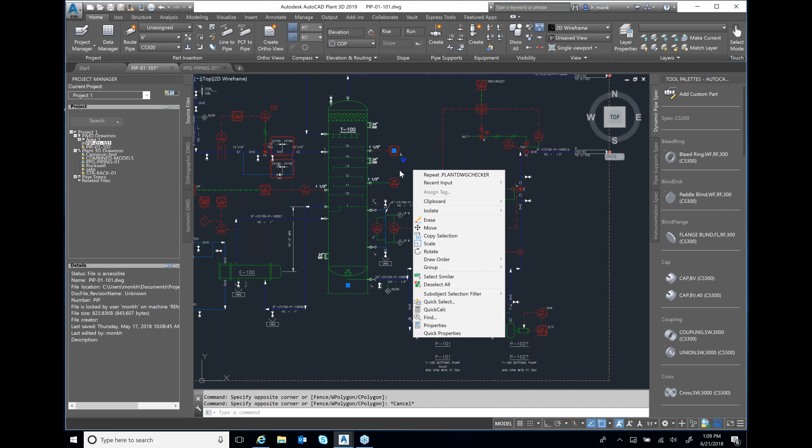So when you see this box pop up, I'm just hitting the right mouse button. If you get lost, I'll point that out a couple of times of how I want to use some information. For instance, let's go create a drawing.

So I'm just going to come over here to the project. I'm running just a simple project - it's got a couple P&IDs and some piping drawings in here. And I just right clicked and let's just create a new drawing. We'll just call this one... we'll call it cansel. So what will happen is I'm going to add a new P&ID to the project.

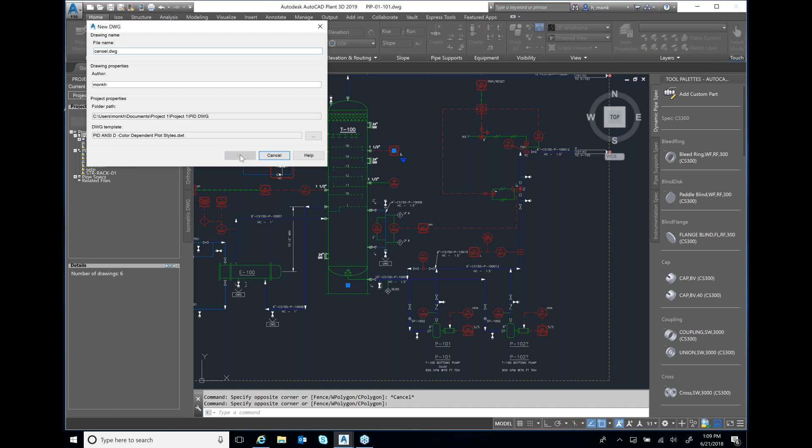And you'll see it pop up on the screen here. There we go. And we'll hit F7 to get - let's get the grid off the screen. Come on. Oh, I got to hit the function key. This is the new keyboards - not a fan of the new keyboards.

So anyway, let's go draw some equipment. You notice across the top that our tool palette is all set to three-dimensional pieces. Now, AutoCAD runs what we call workspaces. So I can come down here on workspace and you'll have all these options. Of course, you can adopt and create your own workspace, but I want to draw P&IDs. What will happen is it will automatically turn itself into a P&ID template system, to where now the equipment, here's the valves and stuff for the P&ID. So all this stuff changes based on what you select.

So let's go quickly, we'll throw some pieces on here. So we'll throw a pump on the drawing here. You'll notice when I place the pump in the drawing, it automatically asks me for a number. The project says that every piece of equipment has to have some type of identifier, P-dash something. So we'll call this P-400.

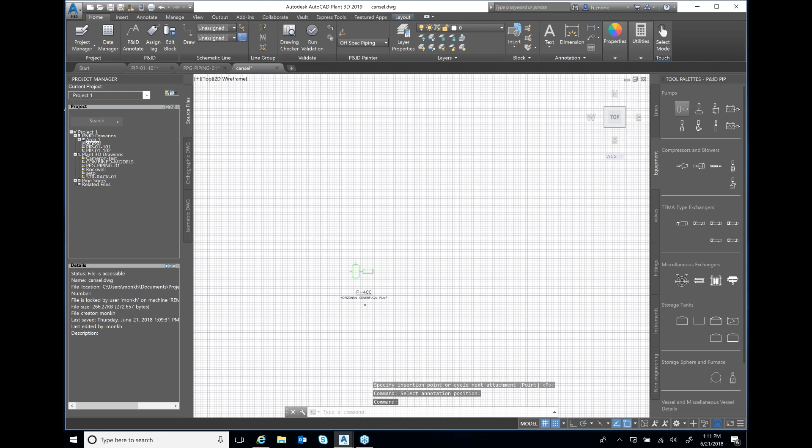We can assign a tag. What I mean by assign a tag is what type of information would you put. We'll throw an information tag on the bottom. And you can see - oh goodness - that's there. You can see that the pump and now the equipment has a unique number to it.

One thing I want you to really understand about this package, and I'm going to say this several times, this is not a third-party package. This is AutoCAD. Anything that you do in AutoCAD, you can do here. And to show that, I'm just going to type in the word copy. As you saw me type on the screen, I'm just going to say copy - I'm going to copy this pump.

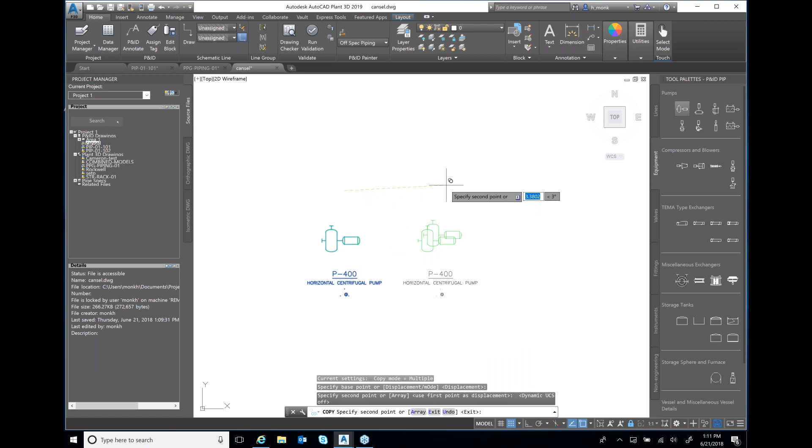We'll drop it right here. You'll notice when I tell it where I want to copy the piece to, inside the data itself, inside project number 1, it says you already have a 400. It will put a question mark there showing that you cannot have duplicate numbers inside a project for P&IDs. So what we'll do is come here - everybody know what the properties box is?

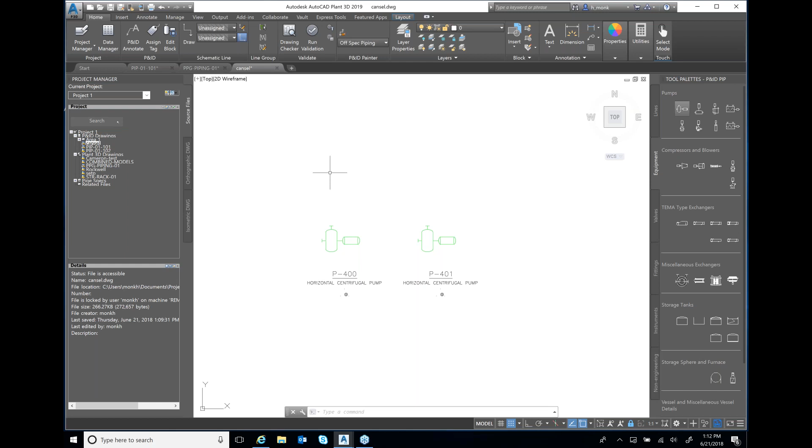I just have to come here and tell it to change that. What it has done, guys, is when I changed that number just by the edit command, it actually changed all the line list, the equipment list, and everything, even though I used free text. This is quite unique to AutoCAD, because remember, this is AutoCAD, not a third-party package, so this data remains intact even when I use free text.

Let's back up a little bit and put a piece of equipment out here, like a tower. Once again it asks me, so we'll throw a number out here, say 505, and we'll drop the tag in. So that's how equipment gets placed in.

The question always comes up: what about equipment that is not in our tool palette? So what's not in our tool palette - if I could do an insert of a block, let's say that's something you have. So we can go out to...

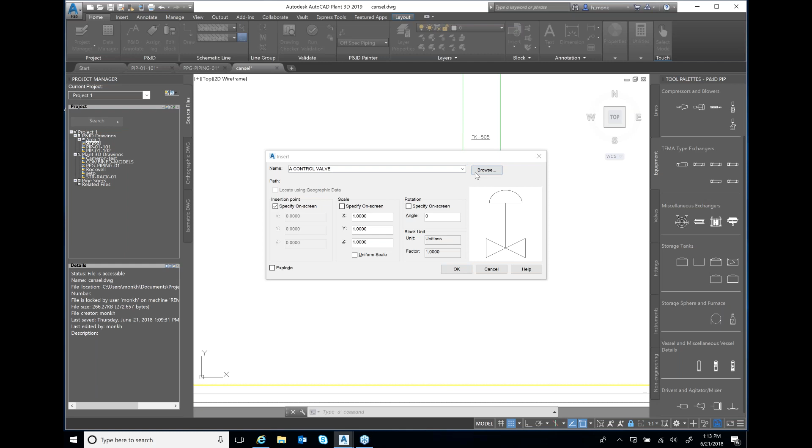Let's see - I had a person send me an exchanger the other day, so I'm going to show you what he sent me and wanted to know about. So there's an exchanger. If I do a list, you'll notice this is strictly a straight block - nothing special about it. It's just an AutoCAD block he brought over from 2015, if I'm not mistaken.

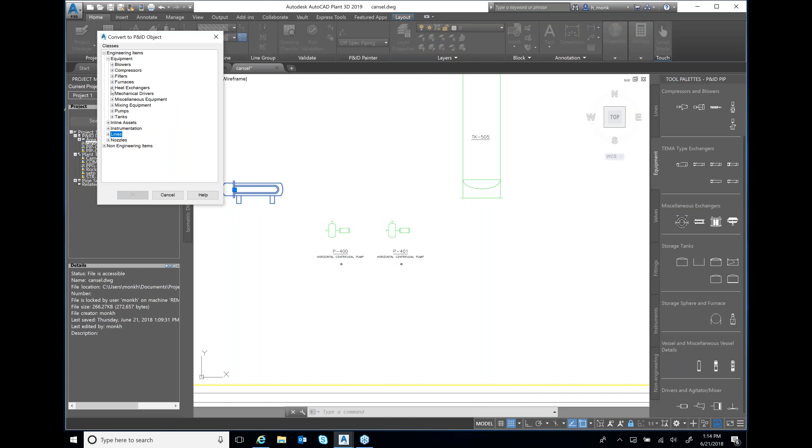So remember the right click - if I don't know what to do, I right click. I want to convert this into a P&ID object. I want to make it a piece of equipment, an exchanger, a double pipe exchanger. And now it is - you notice it has changed colors, and it put it on the right layer.

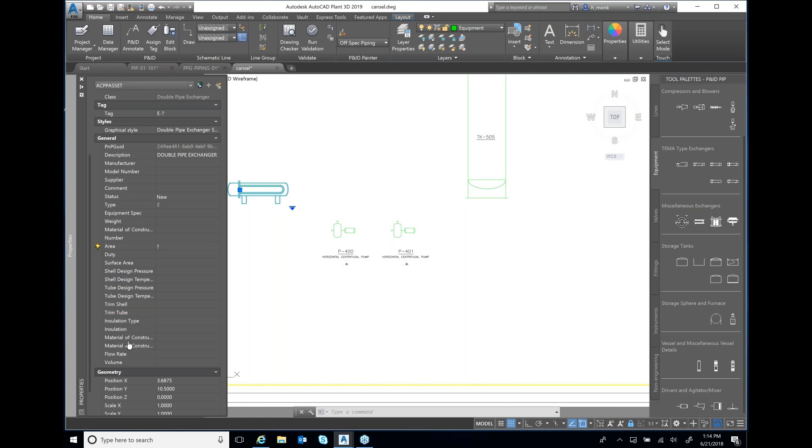Now this block that had no information to it - if you look at the properties box, you'll notice it has completely given it design information. Here's the AutoCAD design information, and here's all the technical documents behind the double pipe exchanger that has been added to the database for you to fill in.

Very simple, very straightforward. Let's draw some pipelines right quick. So if I draw a pipeline from here to here, you'll notice it automatically makes its changes for me. I know this is not great design, guys, I'm just drawing something here. I'm even going to try to draw it wrong, and you'll notice it'll fix it for me.

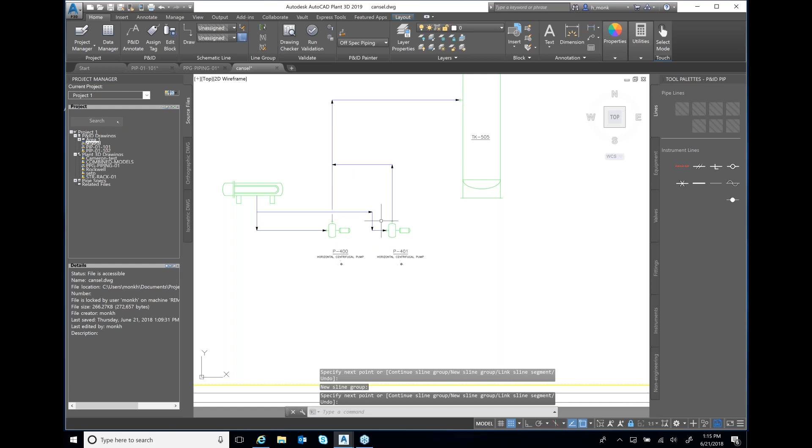So if I try to draw it, let's go from here to there - that's good. And we'll go from this piece and stop it right there - that's good, there you go. Any questions, guys, on what we did? I'm going to zoom in here so you can watch - it automatically puts the flow arrows for us.

It does remain intact, so if I need to do some grouping and moving around - if I need to move the exchanger, we'll move it over here. You'll notice that things do continue to move and stay associated together as I move things around.

The greatest command AutoCAD ever made in its life is undo. I can undo all the way back, and it doesn't hurt the system at all. That's a great feature to have - I call it functionality, because I've drawn many P&IDs and needed that reversed several times.

Let's look at some valves - we'll show you how valves work on the drawings. We'll throw a valve on the line, real quick, and we'll throw another one on the line here, just for giggles, and we'll throw one on the line here. And you'll notice, I don't want a check valve, Harold.

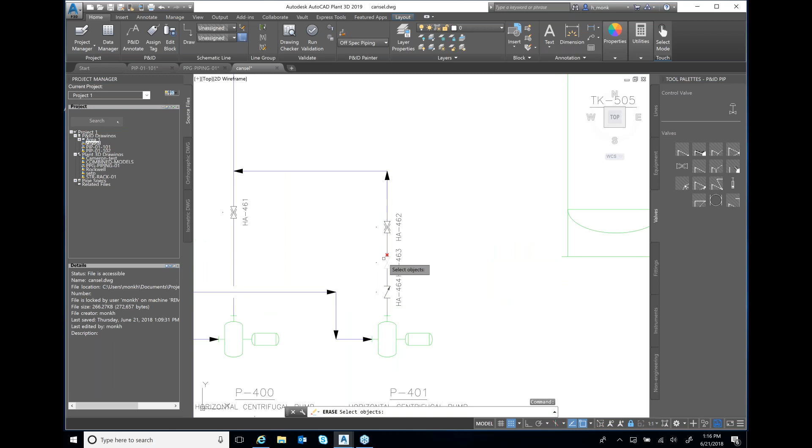Let's put a check valve right there, and I'll erase this one. Just showing you quickly, the functionality to help you draw P&IDs is here. For instance, you'll notice I can move, grab, grip—doesn't matter to the system. Notice the check valve knows which way the flow goes.

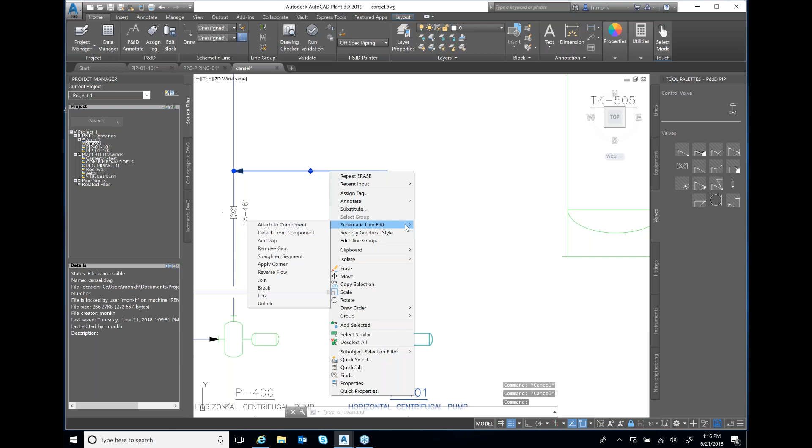So if I right click and tell it to reverse the flow, let's do this right quick so you can see it. If I actually tell it to reverse the flow of that line, it'll quickly fix everything for you, put things in place, clean it up, and it's ready to go. So we can undo that back.

There's also substitutions here. If I don't like this valve, I can say I don't like this one, put a gate valve on there for me, so I don't have to fix things. So I can come here and say put a gate valve on this one, and I want to make this one car seal closed. You notice all that's in here, so I'm not swapping valves out—just tell me what you want to do here. That's how this works.

If I place—let's tag the line right quick and we'll show you. So if I want to assign a tag, what I mean is out of the box, this project says I need a size, spec, a service for the line, and a line number.

So I can say, okay, let's make this line 4-inch. We'll make the spec CS300, and the P&IDs are spec driven. So if you do have a spec called CS300, it actually starts assigning data to the valves and stuff from the hard spec that's out there for the three-dimensional models, which can drive in here.

What about a service? Here's a bunch of services, just comes out of the ISA catalog, so you can make this change. You can actually make this small for your project. And we'll give it a line number—we'll call this one 1212.

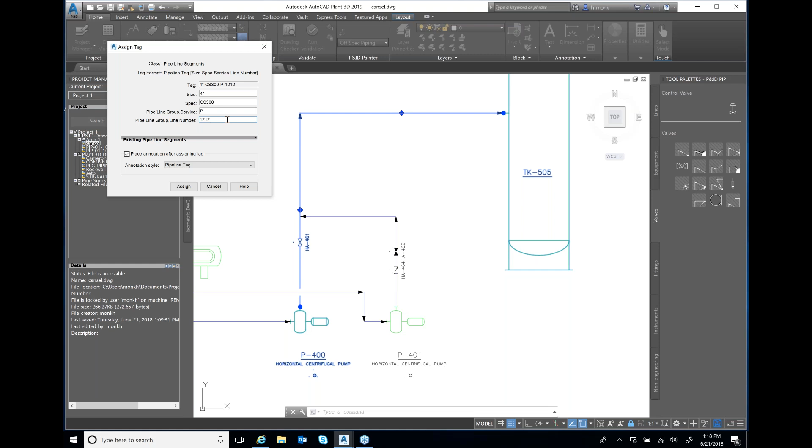So if I tell it to assign the tag, it'll ask me where you want to place it. So there's our tag—it knows if you want to place it in the line, that's fine, it automatically knows to cut the line and get it out of the way. And if you notice down here, our valve is actually changed to a 4-inch.

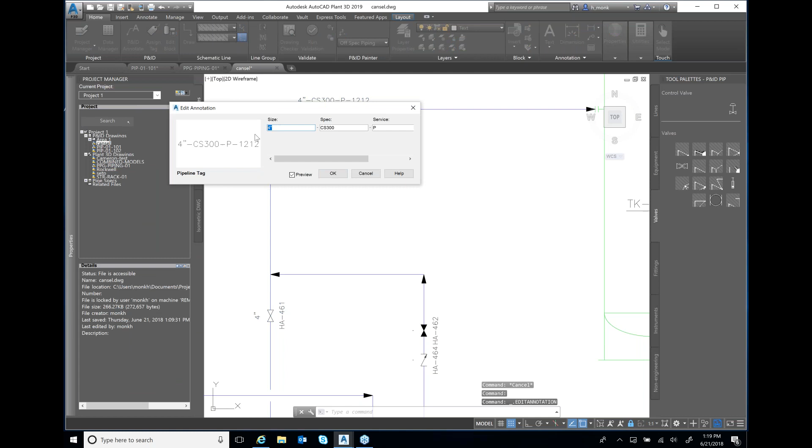If you look at the properties, you notice here that it knows the spec now and it knows the size, just because I changed the information on the line number. So if I say I don't like this as a 4-inch, I actually want to change this to a 6-inch—you notice everything gets changed accordingly.

The question always comes out, what if there's a reducer in the line? Reducers work fine. I put the reducer, I put the size, and it refines everything from that point.

Just a few more minutes, so let's show you the data manager right quick. Everything that goes along, everything that's inside the P&ID, does have a data record inside an Access database. For instance, if I just want to look at the equipment, if I pick on equipment, you'll notice here's the equipment in my current drawing.

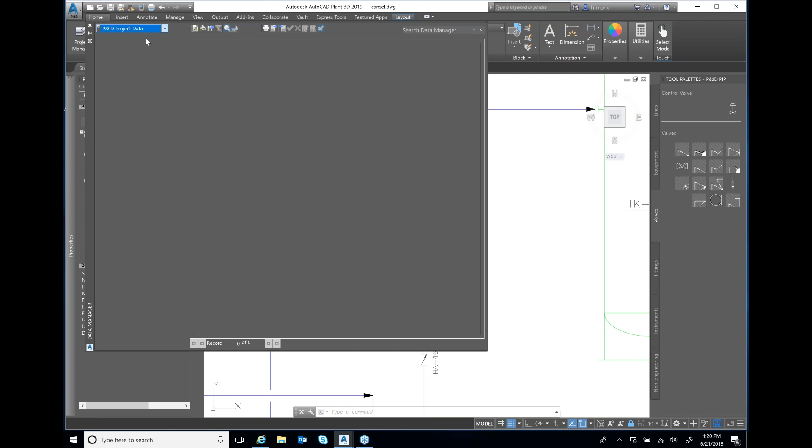Remember, we didn't give it data, we didn't give any information to that piece of exchanger, but I can also come up here and say give me the whole project—sorry guys, the whole project. So here's all the equipment I see in the project.

You could do a couple things right quick, and we won't do that right now. I can actually come over here and renumber them, just by clicking, and it would go back and fix the numbers. Or I can send this whole set of data out to an Excel spreadsheet to fill in the data and send it back. So what you have here is a complete line list.

So here's our line list. This is automatically generated from the model, from the P&IDs. So you have all this data here, and you can send it out to Excel, have someone fill in all the design temperatures and stuff, and then import it back into your drawing.

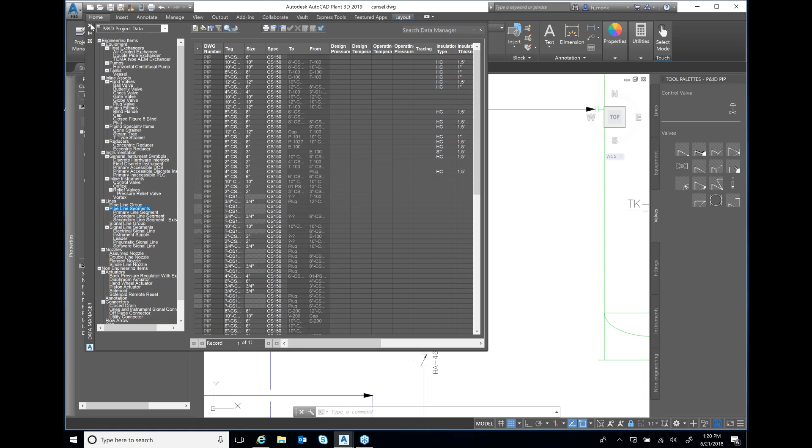Okay, so that's about it on the P&ID, because we want to move on real quick. Again, this is very simple, very straightforward. It was built just for the simplicity of P&IDs, but the data is all there. Even though it's straight AutoCAD, it's still a very powerful tool.

So if you jump over into the piping package, I actually have a piping system drawn here, something I played with. It's just a couple XREF files - you'll notice the structural steel is XREF'd in from the Advance Steel package. I have a collaboration model here that actually comes from Revit. So all this stuff is being put into a piping drawing so I can draw piping around it.

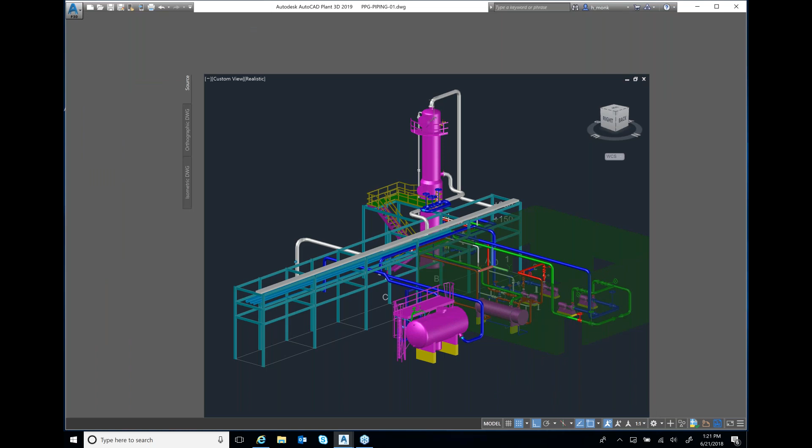So I'm actually going to kick over and change myself back to a 3D workspace. Notice I didn't have to get out of AutoCAD, I don't have to reboot or shut AutoCAD down and bring it back up. I still have my P&IDs running up here at the top, and I also have the model running up here, and it's not going to slow me down at all.

So let's do the same thing here. Let's go draw some equipment. So I'm going to draw a piece of equipment real quick, and we'll just do this one here.

So what I'm doing here is I can add a shape. I'm going to put a torispheric head, a cylinder, another head, a head on the bottom, and then put legs. I can add trim, shape, however I want to do this here, and elevation, where I want to start it at. We'll just go with the defaults - you see here, I'm looking at the defaults. Yeah, 16 foot tall. We'll make it 20 foot tall just for this.

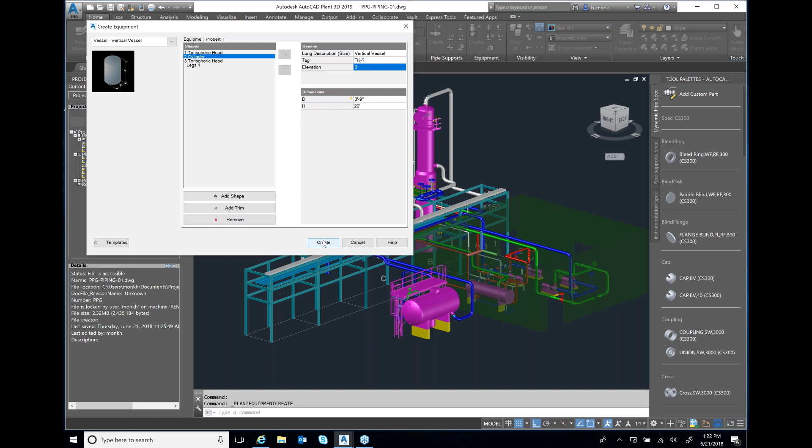So that we tell it to create. So it actually will create the tank, place it on my crosshairs, and notice you'll see that there's our tank.

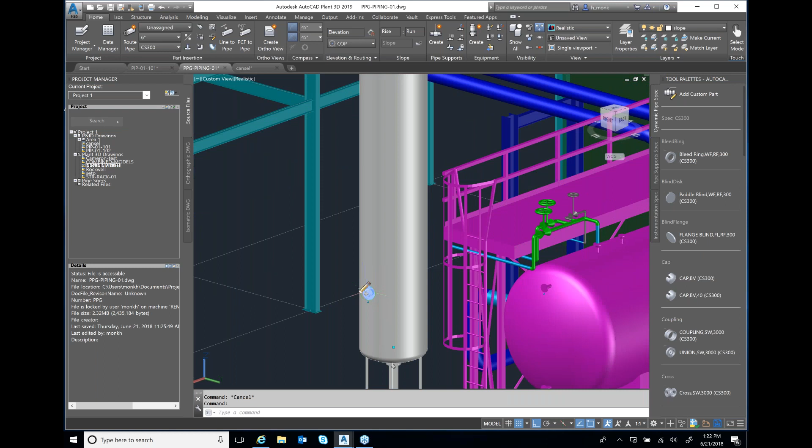Let's pick the nozzle up a little bit. So I'm just going to touch the nozzle. The little pencil comes up. I want to edit the nozzle. There you go. And the nozzle says, okay, this nozzle, and it points at that nozzle right there, is a 4-inch flange, 300-pound ANSI ASME B16.5.

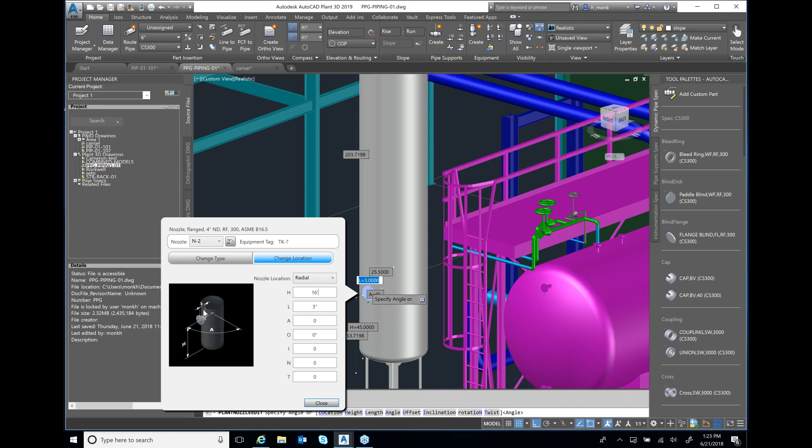And I want to actually move this height, change location. So let's move this height up to say 16 feet. You can change the nozzle projection if you want to - we'll change it to say 4 inches. And then we can close it. There you go. So there's our nozzle that we placed on there.

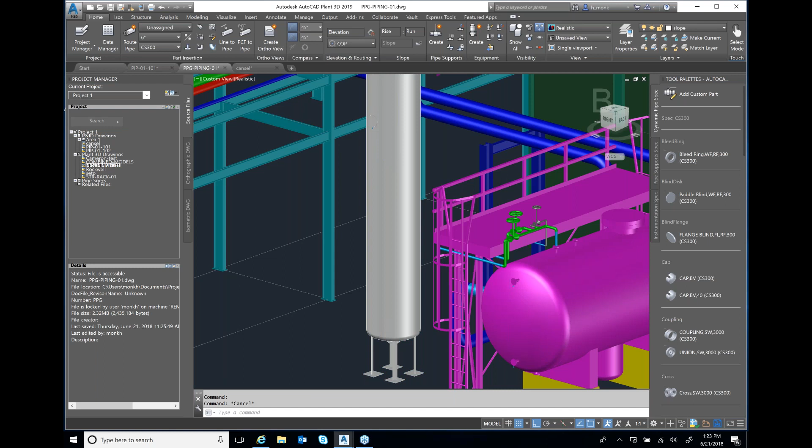And if you just touch the tank, it'll allow you to place as many nozzles as you want to using those simple tools, dialog box to place those. So there's our tank. So let's go throw a piece of centrifugal pump in here.

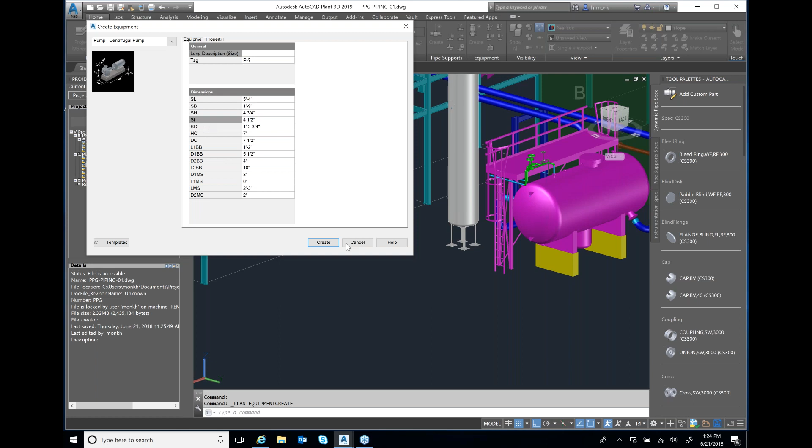So let's go throw a pump, centrifugal. We won't worry about going through this, but all this allows you to set up based on your data sheets that you have. So if you pick one of these components, it actually will show you the drawing itself of how to place them. So we'll tell it to create.

We'll throw it on this line right here just for giggles here. We'll go this way. There we go.

Now we're going to draw a pipeline between here, these two pieces of equipment. There's a couple ways to go about this. One is just to draw it yourself - you can say I want to set up a line number, I want to set up the spec. If there's a P&ID out there, you could actually reach over in the P&ID and pull the data out. Here's all the stuff here you can set for that.

So if I actually pull up a line list, let's say I want to pull up - remember the line list we showed earlier? I actually want to pull up the line list. So I'm going to pull up, cancel.

Let's move this out a little bit. I only had one drawing, you see it right here. Here's our draw, here's our line. We only identified one line in that P&ID.

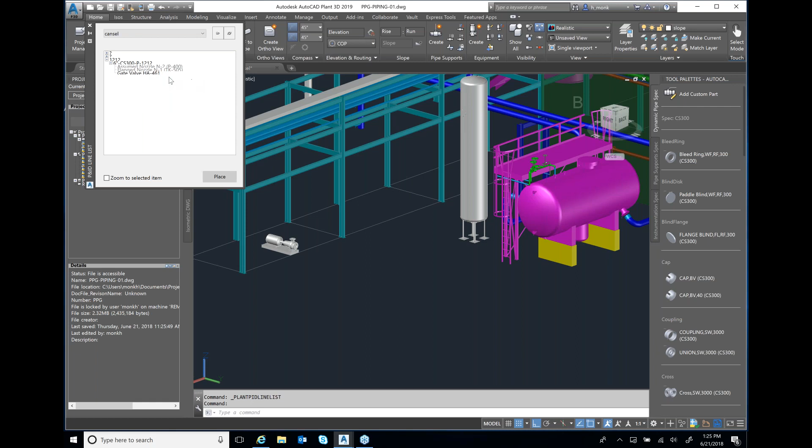So here is the data on that line. If I wanted to see, it tells you it's going from nozzle 2 on pump 400 to nozzle number 1 on TK05. It's got a gate valve on it. So all this data is here.

So if I want to draw, remember I right click, so I tell it to place this item. And as I come down, you notice it grabbed it. Let me zoom in here so you can see right here. It actually grabbed the nozzle of the pump, and I'm just going to say go out 24 inches.

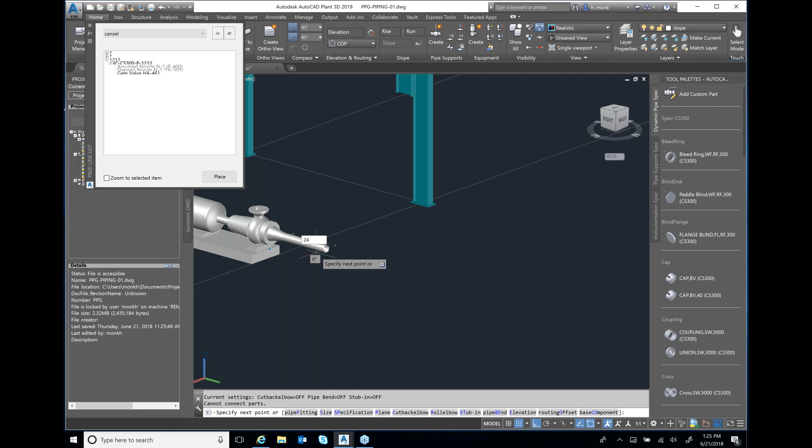And I'm just using AutoCAD, the dimensional data, and then I want to go up, say 24 inches, and we'll stop right here for the time being. Okay, you notice that it went into the spec, it grabbed the correct bolts, gaskets, and everything to do with it. It actually put a reducer on the line because it's a 4-inch line, since I never saved it in the other drawing. So the database says it's a 4-inch line, and we'll fix that in just a second.

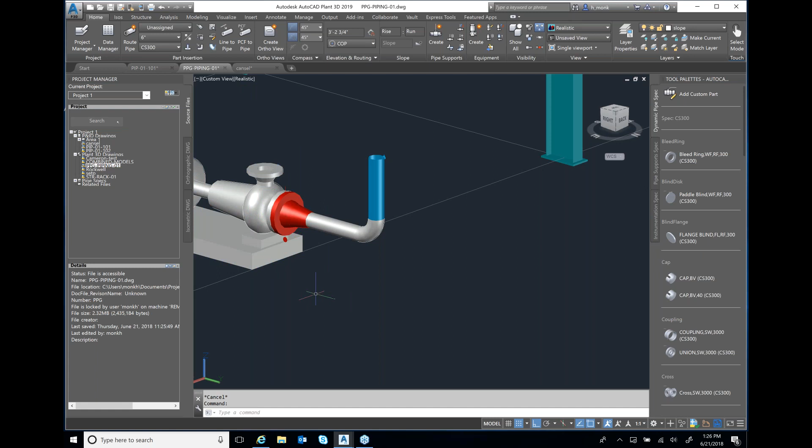So actually it's creating me, so it actually bolted everything up. It went in the spec, pulled out all the correct components and bolted it up for me. We're just trying to make you as efficient as possible, and not have to fight software to actually lay something to design.

So I want to go to this nozzle right here from this pipe. So what I'm going to do is I'm going to touch the pipe. You notice a little plus mark pops up. So I'm going to say I want to go from that pipe to that nozzle. So if you look at the bottom of the screen, it says I found, this is one of 4 ways to get there.

So it kind of looked in the spec and figured out, okay, here's the components I got, this is how it's going to go together. So I can hit N for next, and let's see what we get. That's an interesting one. That's good, I guess. We'll do next. Let's do next one more. Let's do this one.

All right, so I'm going to accept this one. I'm going to show you why. So I'm going to accept this idea of routing. And it only came up with this because I only came 24 inches.

If I had come up 10 foot with this pipe, it'd have made that change for me. So we'll accept this routing, and you'll notice it'll actually go in and make the changes for us. So now I've routed my pipe. Right now, this will get me probably written up for a tripping hazard.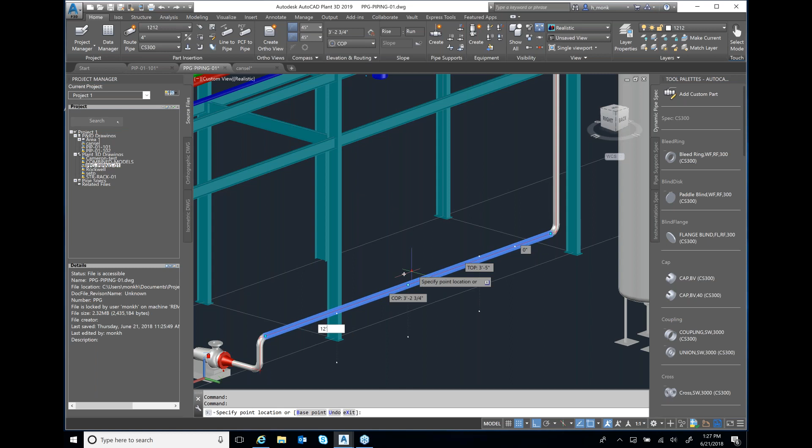So let's do this, let's match this. So I'm going to ID the top of the steel, 12'6". I'm just going to touch the pipe. And I don't know if you know much about the new dynamic displays in AutoCAD, but I can kick through these and see where it says bottom of pipe, 3'5". Well, I'm going to say I want the bottom of pipe to be 12'6". So it makes the changes for me and fixes everything as we go into the system here. Very simple, very straightforward.

Okay, let's see, we got a valve we got to place. Okay, so let's go place the valve. So in the line list here, we got a valve. So I'll just say place this item, and it's coming from the P&ID. So my design team doesn't have to look a whole lot. It's already there because it's what's built into the actual spec itself.

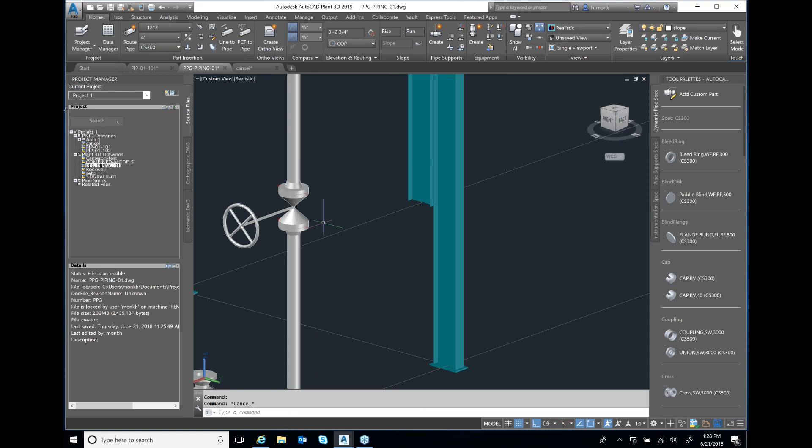You have things like substitutions. Remember how we substituted the valve in the P&ID? I can actually substitute things here. If I got multiple things in the spec, I may want a slip-on flange there, and things are fixed for us real quick.

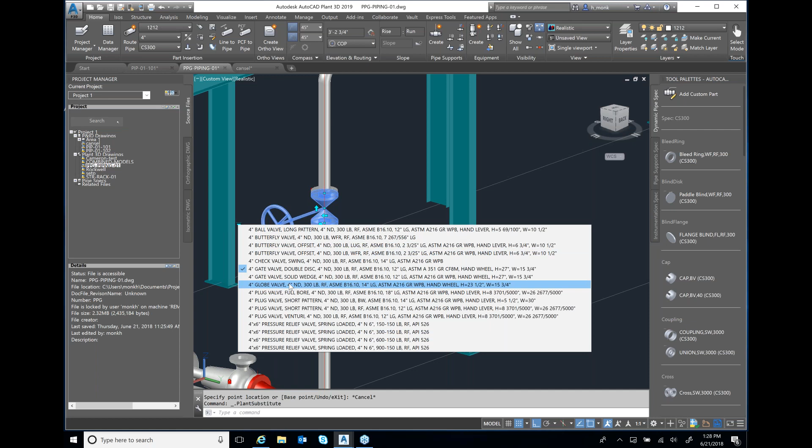I may want to change because this handle may be too long, and I need a ball valve. So I actually can come in here and tell it, let's use a ball valve long pattern there. So these are all at your fingertips as you design.

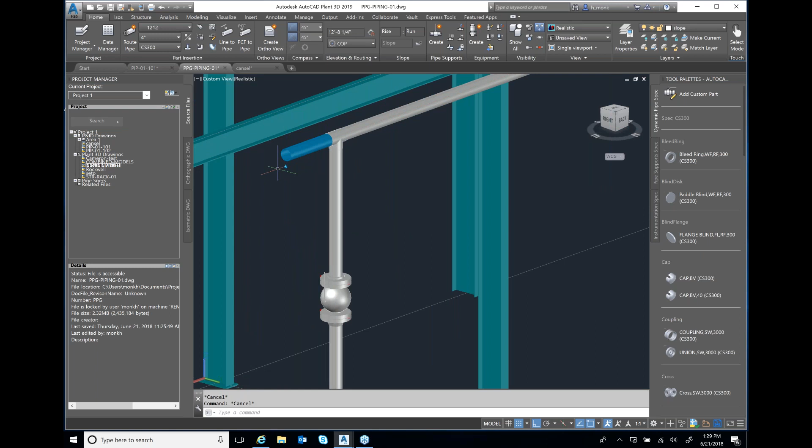Remember, I told you we're trying to get functionality here, not necessarily features. I just want to be able to draw. For instance, if I want to come here and touch the elbow and come out with another piece of pipe, you'll notice that it automatically makes that adjustment for me, takes the elbow out, puts the T in there, cleans it all up for us.

If I want to put, let's say I want to come on this pipeline and put a 3/4 inch tap that we want to put some type of sample station on here, I can tell it to actually come in here, touch the pipe.

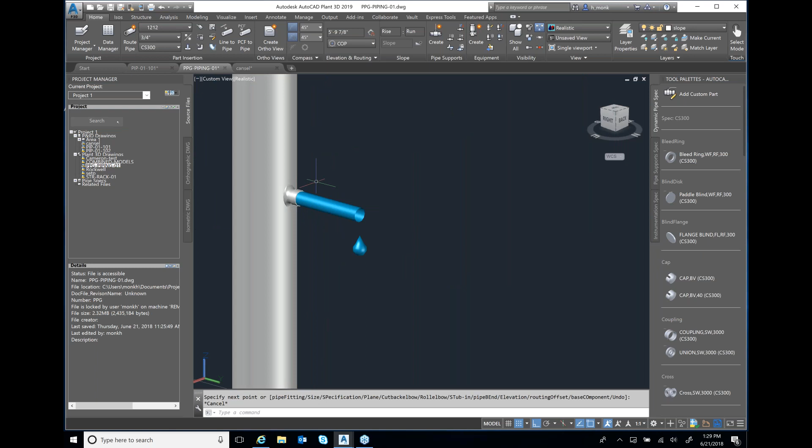I want to put a 3/4 inch tap off of here, and you'll notice it automatically looked in your spec - remember, specs mean something. It looks in the spec, grabs what you need - I think that's a sockolet if I'm not mistaken. So it pulls in the sockolet, taps it on the line, and you're ready to go. That's not physically tapping on the line - I can still move this guy. If I don't like it here, it's fine, I can slide it around and it works great.

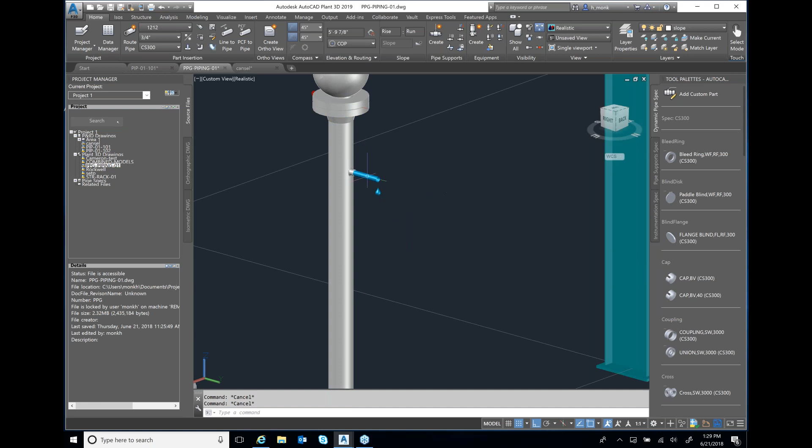If I want to make it 6 inches off of the weld here, I can do that also with the dynamic display dimensions. Quickly, supports are always important.

So let's go put a pipe support. Lots of options here on pipe supports, guys - I've got more pipe supports in this package than I've ever seen. Give you an idea, if you don't like any of these, you can actually create your own block, and that's fine with us. The joke is at Autodesk that they put this in for us Cajuns in Southern Louisiana, because we go to Home Depot and just buy a block and stick it under the pipe.

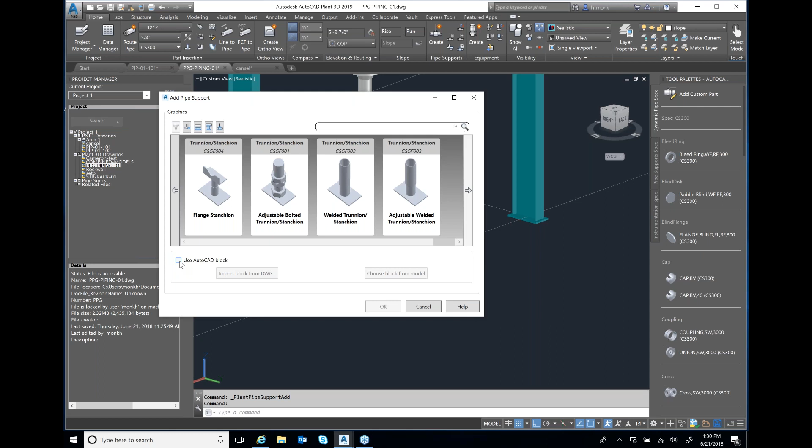But if I just want to put a welded shoe on here - let me get this thing right, come on Harold - you notice, even though it was a different size, when I touched the pipeline it knew to adjust the size for me. I'm not having to go back and do all that stuff. And yes, there is a record in the database for this component. It is tracked - see right here, all this data is tracked to shop and field, whether it's extended or not. And you can actually make adjustments on it.

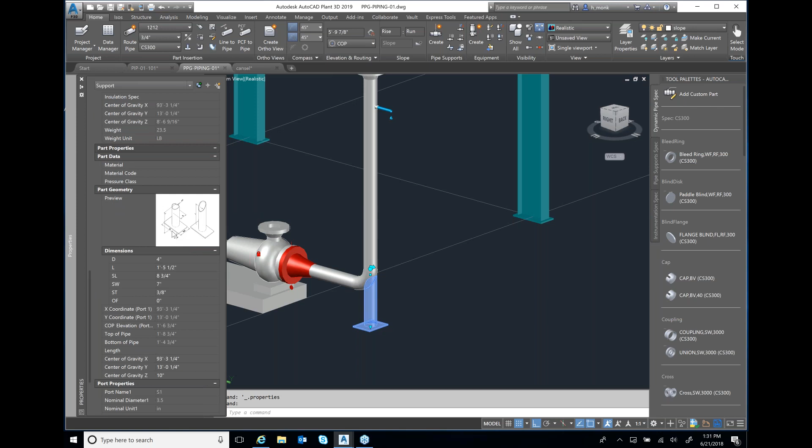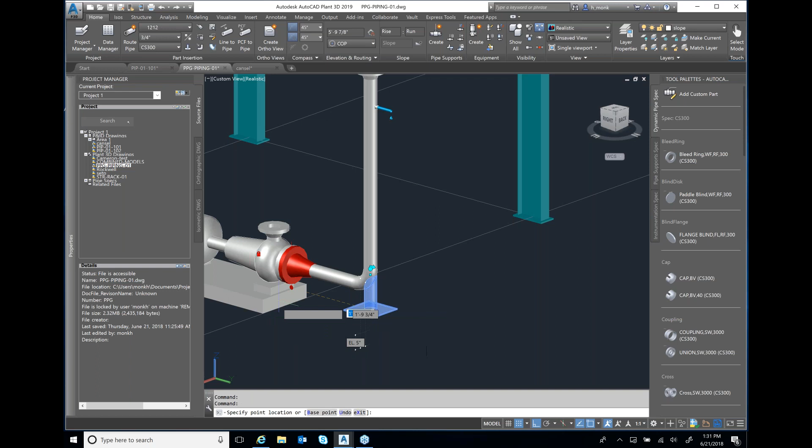See right here, your dimensions, your height. So if I want to make the base 12 by 12, I can actually come in here and say I want the SL and SW to be 12 by 12. And let's say make the length just 12 inches. So all this stuff is here, data. If that's not right and I want to eyeball it and say I want this piece to be the same as the bottom of that, that works fine just as well.

So all this is here for you to design inside the world of Plant. Very simple, very straightforward, not difficult at all. Remember, I told you what I was after was trying to put functionality back into Plant. Notice how many pull downs I use, how many tool palettes I have to use - I have placed everything that you need to design with at your fingertips.

It's very straightforward. You also have a sloped calculation - you can actually draw it flat. Say I want to slope it at 1/2 degree, it will actually slope all the piping for you.

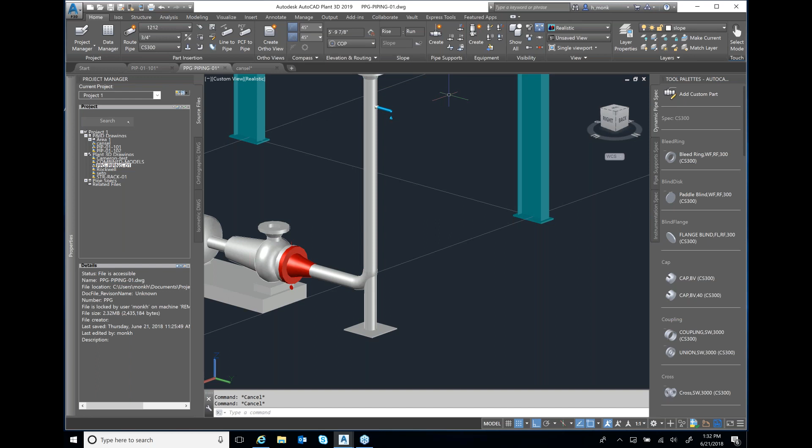Let's see here, what else we want to do right quick before we start going off on ISOs. I'm watching my time - let's go make some ISOs out of this line, just quickly. So what I've got here is a pipeline, we'll save it right quick, do a save right quick on the model here, and then I'm gonna go make some ISOs.

Now ISOs - for years I ran isogen, for almost 35 years, believe it or not. I've been around that long, so I do have quite a bit of experience running isogen. And so what we went and did was take that concept and actually put it into an AutoCAD world, because isogen created DWF files for AutoCAD - well, why don't we just make something for AutoCAD?

And this is what you're fixing to see here. It's got the same setup, or the same properties, that you run with isogen. You can mark your reference columns, you can leave messages, you can put flow arrows, all this stuff. You can put stop points, break points. So we'll run one right quick and make a production ISO.

So here's the line that we have, it was a 1212. I have several different styles, so I can say run me a final C size border, and there's an advanced tab here that's pretty cool - you can actually pull it up and make changes to how you want to split this one drawing, whether you want distance offset. For instance, let's say your monument mark is at 10,000, and you drew your model at 0,0 - you can actually put this distance in here and it'll actually make the adjustments for you so your ISOs are correct.

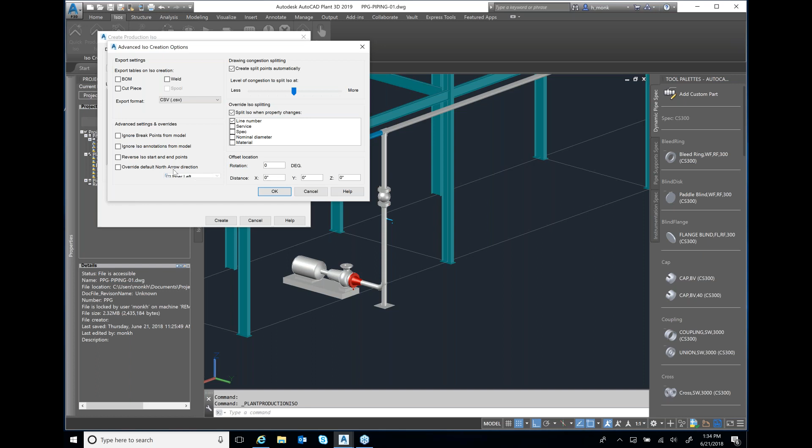You can actually turn the north arrow a different direction for this one drawing if you want to. So I just tell it to create the ISO. It takes about 7 to 8 seconds per ISO. I've run it, and you'll see it flashing down here in the bottom. It's telling you I'm running it in the background, so you can continue to draw and work inside the model - it's not taking you out of the model.

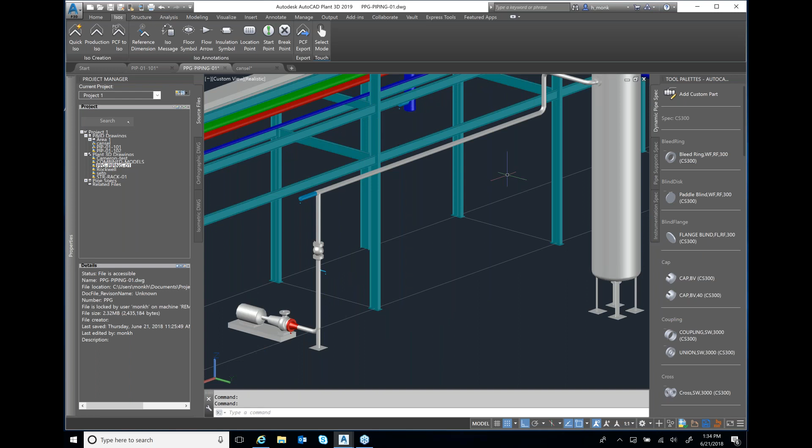And then to pull up here real quick - I ran a test the other day, about 3 weeks ago, on 300 ISOs, and it took a matter of, I think, a little over 2 hours. It ran 300 ISOs for us to look through.

Now let's see what we got here. It'll pull up and tell us it's finished. There you go, yeah, it is finished. So here's our ISO - it time stamps the ISO. This one took 39 seconds. It took a little longer.

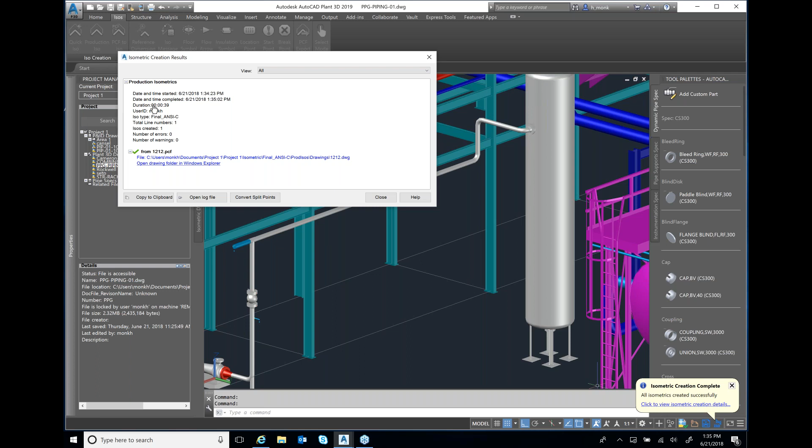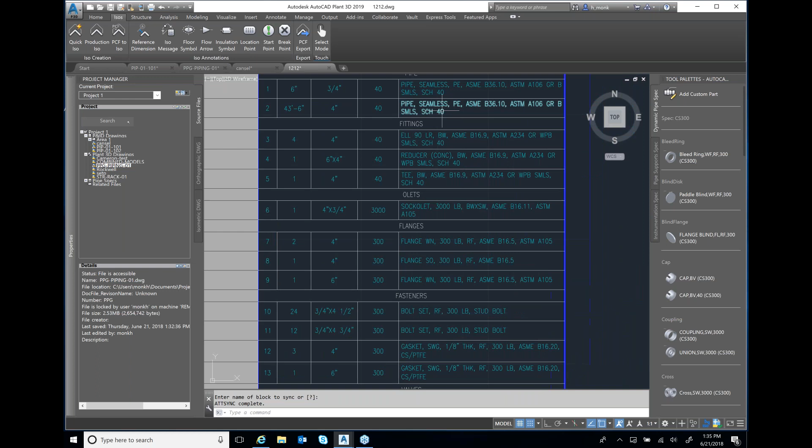So let's go see, because I think I put everything in here. For instance, yeah, see, everything's on this ISO. I have a weld chart at the bottom, a weld calculation, and the type of welds. So if you want to do cost analysis on what it's going to cost you, here's a full bill of materials based on your spec. So this is the description that you have in the spec. Here's the sockolet that we placed in the flanges, the slip-on flanges and all.

And it's based on the new tables that are in AutoCAD - if you don't like those, you can change them. But what you have here, guys, is a complete isometric of your drawing. And if you notice, it's very clean.

We don't cross too many things unless we have to, just for clarification purposes. And it also is dynamic, so if I want to move something, I can move it and it stays intact - the flow arrows - because this actually uses your dimension variables. So if you have a dimension style that you want, you're welcome to use this, and it actually works very well.

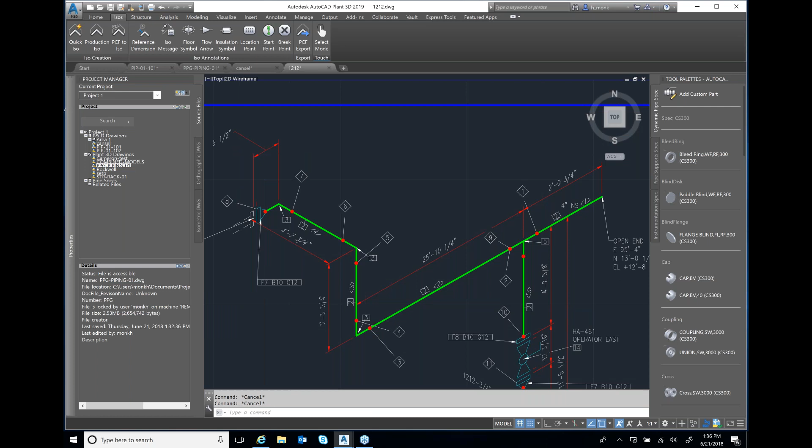So let's make sure everything's here. There's our valve, there's our sockolet, there's all our dimensions here, and here it tells you it's connected to the vertical vessel 300. Let's see what we've got here. There we go - so there's the ISO, quickly extracted out of the box.

Lots of ways to change this. We have a complete system to turn off and on what you don't want. There's some things here repeatable - for instance, if I run this ISO again, and this actually has 2 pages, it will give me the same identical 2 pages back when I run it a second time, because checkers don't like it when you run an ISO and it comes back different. So we actually set this up to where it's repeatable every time you run it.

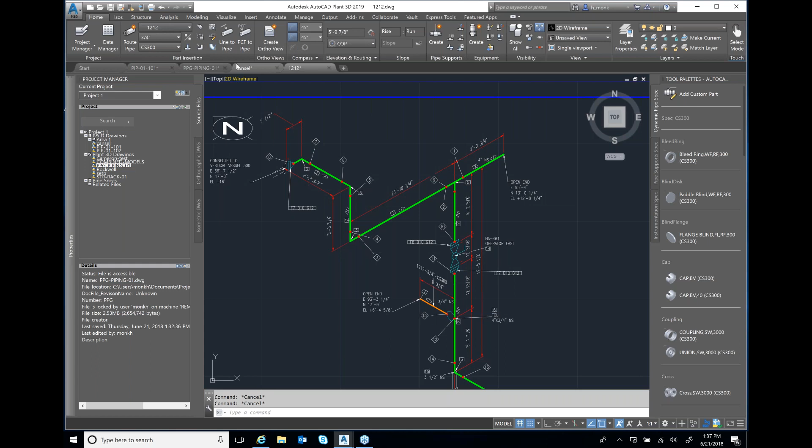So let's go back and create an ortho real quick, because everybody likes orthos. So we'll just leave this and run it. So I'll go back to ortho. Let's get a place up here - I got a big place up here. We can cut these. Here we go.

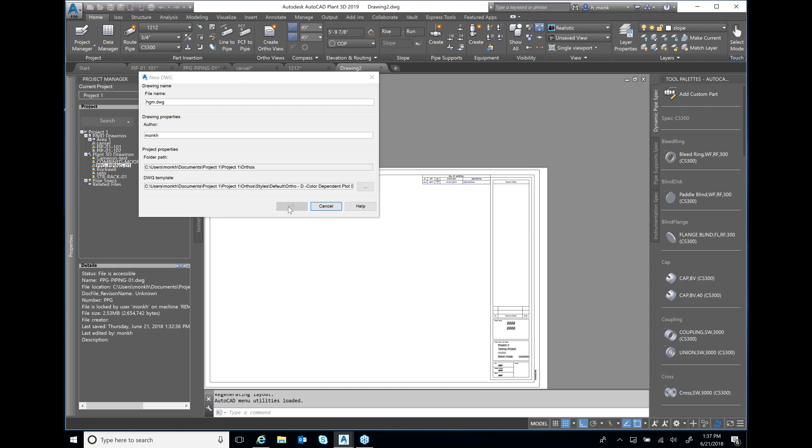So let's cut an ortho right here real quick. I'm going to create an ortho, very simple here - I'm going to create a new drawing. We'll just give it my initials. And what it does, guys, is it pulls up a drawing, kind of not a paper space, but it's actually a new drawing. And it says, okay, here's your model that you're going to be working with. See it? So here's our model.

I can now go in and say I need to add some pieces. Let's say I want to add the steel in this picture - so notice the steel popping in. You can go in and say I want to turn off the piping, I just want to do a plan view of the equipment, I just want to do equipment layout. So I can pick and choose how I want to cut these views. I want to come from, not the top - let's come from the front.

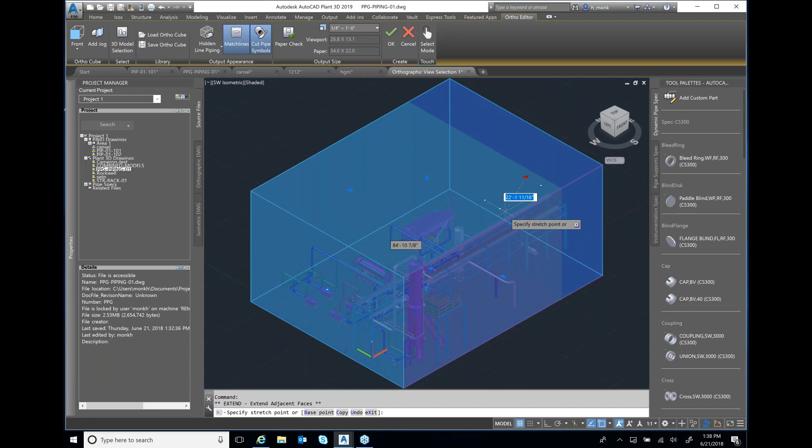So let's come from the front view. I'm going to cut a view between this column. We'll go to just that column right there. That's good. And then I want my scale to be 3/8 equals a foot.

Here's hidden lines. Do you want hidden lines? I can say I want to hide lines, hide all hidden lines, or just hide the piping lines and leave the equipment dashed behind them. Or you can just say no hidden lines. We'll just do that and tell it okay.

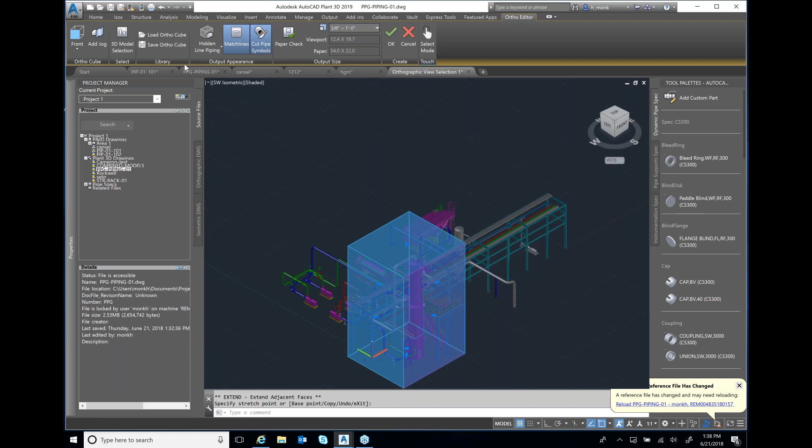And then it asks me where I would like to place it. Let's drop it right there. So what it's doing is actually going in and building you a complete setup of what that model consists of. You see it? So there's our complete system.

Now you notice it actually has a different drawing. It's not a tab here, it's its own DWG file. Now this DWG file you're looking at also has data. I can actually right click on this data and import from it.

Now if I want to put a line list on here, the line size and what have you, those are easy to do, just by annotation here. I can touch the line and do the annotation.

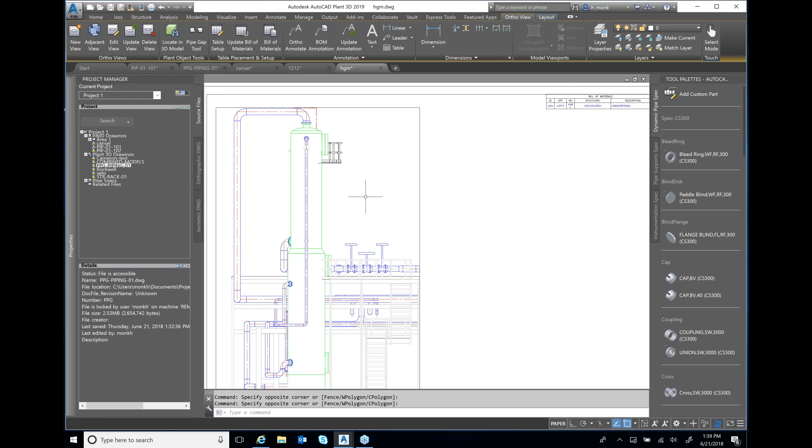But what I want to show you is the main question that comes up: what if I do all that and somebody changes this piece? Well, let's go try that.

So I'm going to go up here back to our drawing. Let's do this right quick. I'm going to just use my AutoCAD stuff. Let's make some changes here, pull this in, and let's go put a valve in the line.

Let's put a butterfly valve. That's good, we'll drop a butterfly valve in the line. We'll put the handle this way so somebody can reach way out there and get it. And we'll throw a T. No, that's not what I want to do.

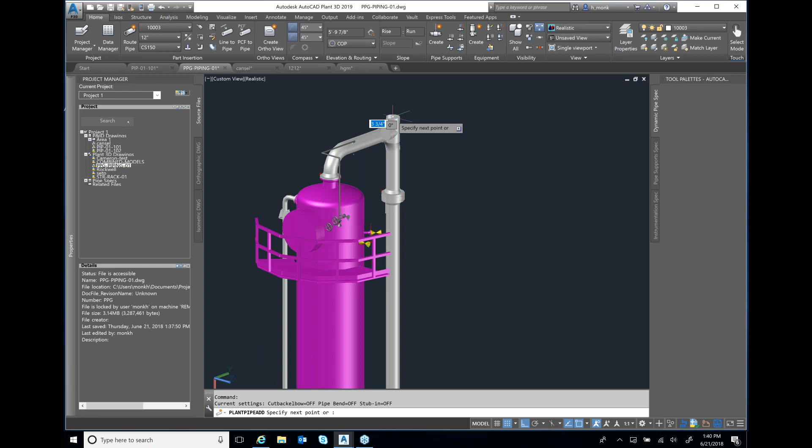Undo. Let's put a tee going this way, going out. And we'll continue, and then we'll make a drop. There, that's just something to look at.

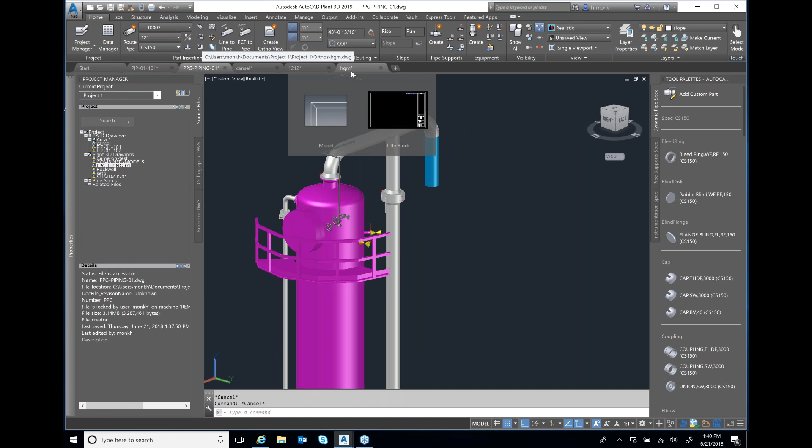So I've actually made a change here to the actual model while hgm is over here sitting, as someone's already starting to annotate and clean up and get ready. So what happens here? If I save this model here, let's go back and do a save.

I have the ability, if you look at the orthographic drawings here, it will tell me — so here's hgm, let me pull it here so you can see it. I can say validate my orthos. For instance, let's say once a week all the changes that are made, validate those drawings. You can say update those views if there's been a change to the model, go update everything out there that I want to see. Update annotation — you change the line number, go fix the line numbers for me. So I sometimes do it here, but I've been accused of using slides before.

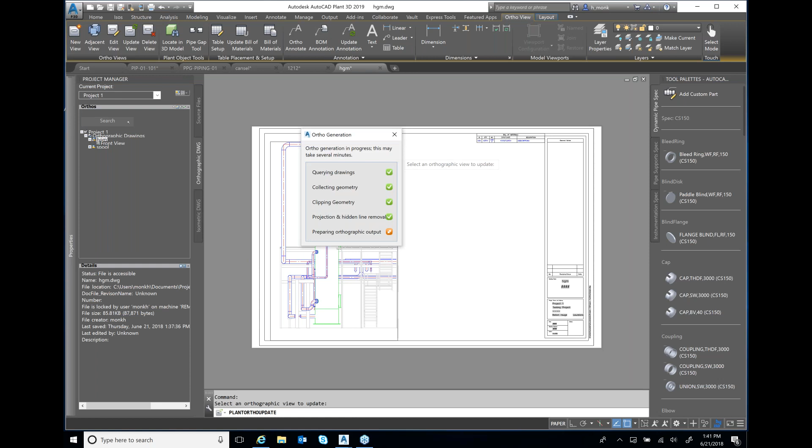So what I'm going to do is actually go back to this drawing, and you'll notice this drawing's incorrect. But there's an update view right here — it's the same command as the other one. So I'm just going to run it from here so you can actually watch what happens. It will go in, make the changes that it sees it needs to make, completely redo my drawing, clean it up, fix it, and I'm ready to go.

But this is, like I said, this is not a tab in paper space. This is actually its own DWG file. And once I'm in here, I can do a lot of things.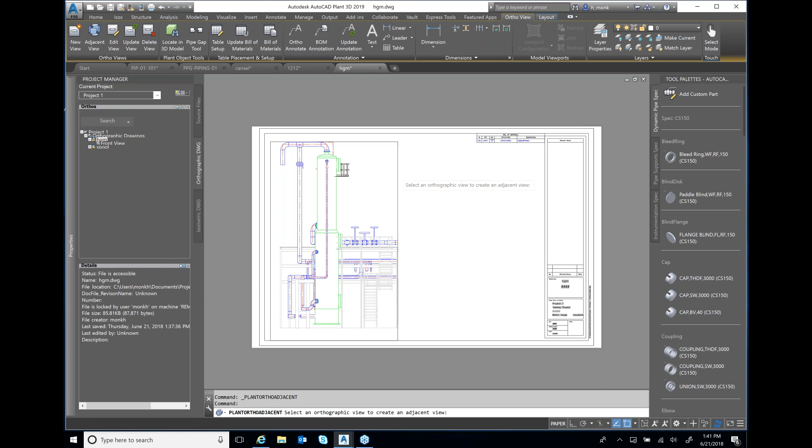I can put a bill of materials here, I can tag it if I would like. If I want another view, for instance let's take the adjacent view of this guy, and I want to use the top view and drop it right here. So I can actually cut all these views at any time and set these up. There you go. So I can set these up as I'm drawing, and it works very well.

And how it works — this is a completely flat drawing. If you want to send this to your client, you're welcome to. It is a complete, simple, flat AutoCAD DWG file. You do have control over the layering structure if you want. If your client is requesting that center lines are on a layer called center line instead of CL, that's fine.

You want equipment on the equipment layer, and they're red, that's fine. This is just a default setup, the way it comes out of the box. You can completely change how you want to run this.

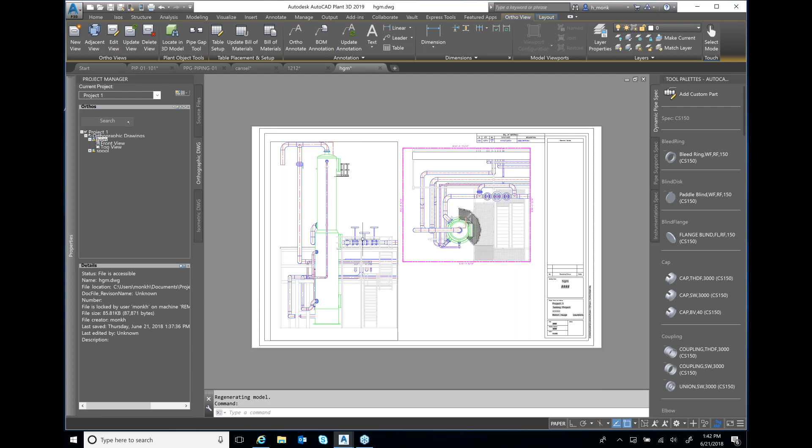So quickly, let's go back through here again. This is very simple, very straightforward. One thing I wanted to touch on real quick is about the equipment.

This piece of equipment here, guys, I drew from our equipment generator, the dialog box. This other piece of equipment, I actually drew in AutoCAD. I changed my workspace to AutoCAD Solid and drew it in AutoCAD Solids.

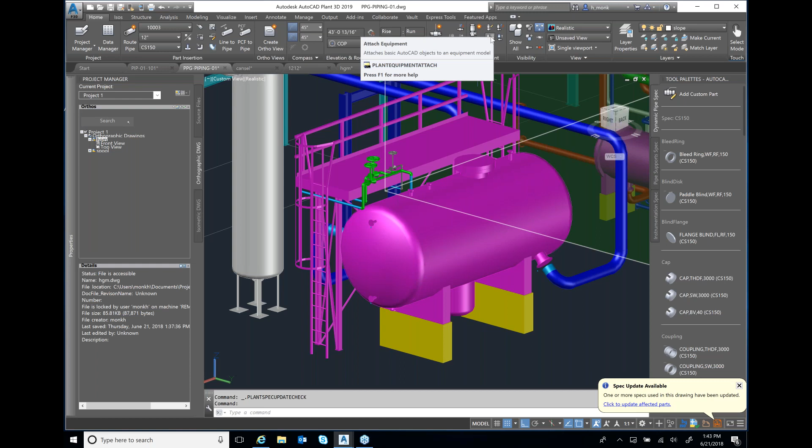There's a function here that says modify the equipment, attach equipment, convert equipment. When I mean convert equipment, I can bring in any custom object, doesn't matter what it is, and tell it you are a piece of equipment. For instance, fin fan units, compressors - these are all custom built. So you draw it in AutoCAD, and I'll just say, okay, that's fine, I'll take that as a piece of equipment. You just show the nozzles for me.

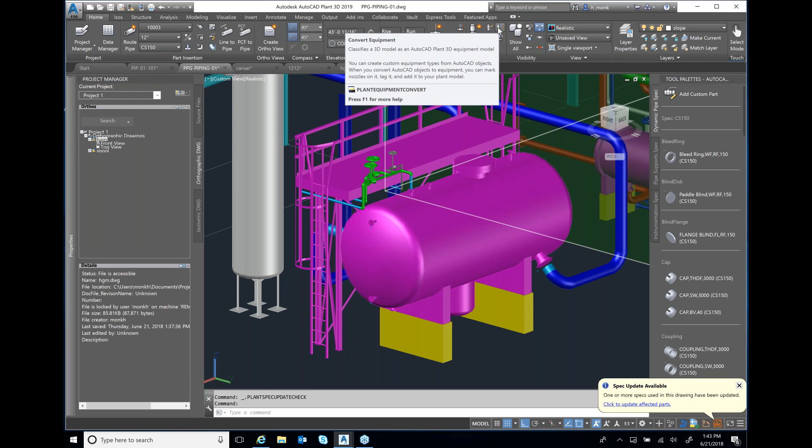That works fine. The other way is if you're using Inventor or people use SolidWorks and that kind of stuff, fine - they can be imported in here just as well, and you just start drawing off of those pieces.

So quickly, guys, that is Plant in about 45 minutes, and I want to give you plenty of time to ask questions.

That is something new for 2019. Prior to 2019, you would purchase AutoCAD, and then you would purchase a seat of Plant to run on top of AutoCAD. Starting in 2019, when you get your AutoCAD license, you have access to download Plant and P&ID for free. Since it's inside the AutoCAD kernel, it was getting a little difficult to maintain the AutoCAD code for Plant separately from the AutoCAD code for AutoCAD. So it was decided in 2019 that it's the same code, so you will have access to it. If you buy or subscribe to get 2019, you automatically have access to getting Plant and P&ID for free.

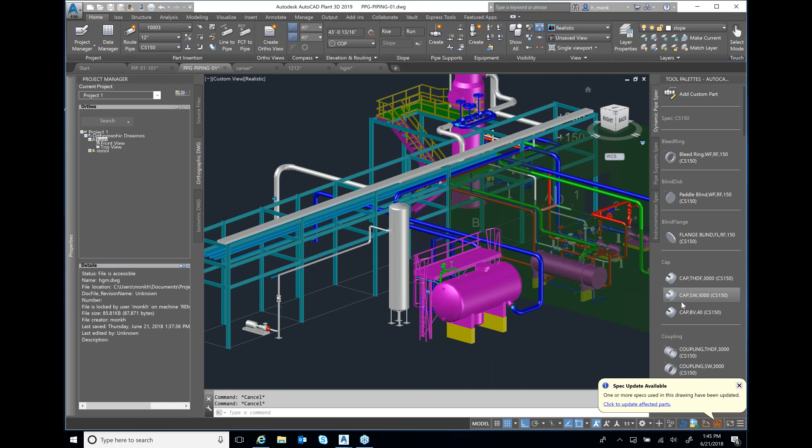Let's see what we got here. Let's see if we have any other questions. I can open it up to Tony or Gina for questions.

Yeah, so Junaid's going to start answering one question we have. Here, Harold, just give me one second. Sure, okay, great. Sorry, guys, just give us one second.

While we're waiting right now, Harold, could you send your desktop back to my screen?